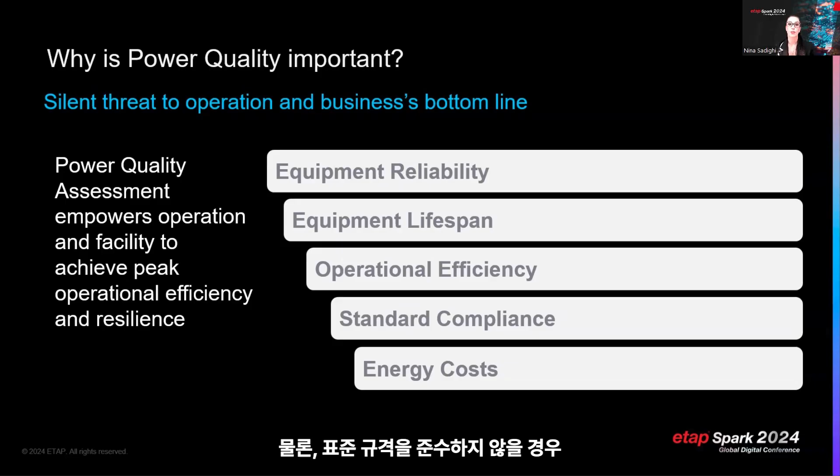So why is power quality important? Power quality is the silent threat to your operation, and it is costing you money. It impacts equipment reliability, it impacts equipment lifespan, it impacts operation efficiency and energy costs as well. And then, of course, if you're not complying with the standard, then there will be penalties for that as well.

So what causes harmonics in EV fleet? It's power electronic converters, rectifiers and inverters converting AC to DC or vice versa, switching operations, rapid switching of transistors, charging or fast charging methods and patterns of charging. And then, of course, whenever we have one charger, the system reacts completely differently than when we have a fleet charging, which is charging 300, 500 EVs simultaneously.

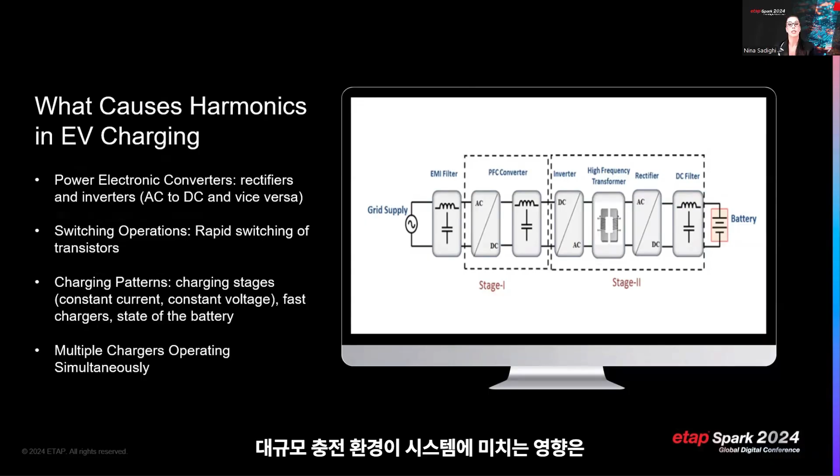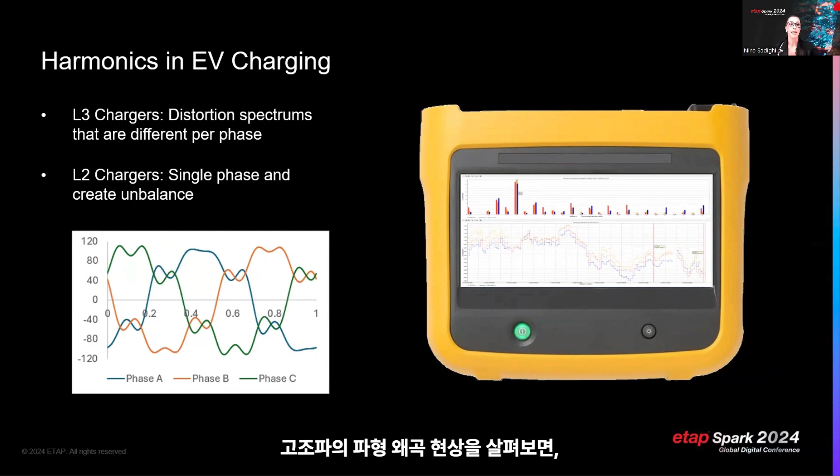And how that impacts the system is very different than what we're seeing in the lab, or what's shown on the cut sheets. So harmonics in L3 chargers, the distortion of the waves show very differently per phase on an L3 charger, which is a three-phase charger. And then on the L2 chargers that are single phase, we also noticed imbalances in the system.

So how did we go about planning this field evaluation? We collected data at multiple points for an agreed upon duration, so 4 to 6 weeks at each site, at the point of common coupling, at the switchgear, at the panel level. And we brought that into the ETAP model, which Jose will explain a little bit more. And then from there, we put together a root cause analysis, a comprehensive report that also focused on compliance review, and then developed an action plan, installed some mitigation solutions, and further evaluated our field results.

And what we noticed is that we increased energy savings by 10% and then increased uptime by 20% in the fleet. So then we took that feedback back to design, standardize and modularize the design on the EV fleet.

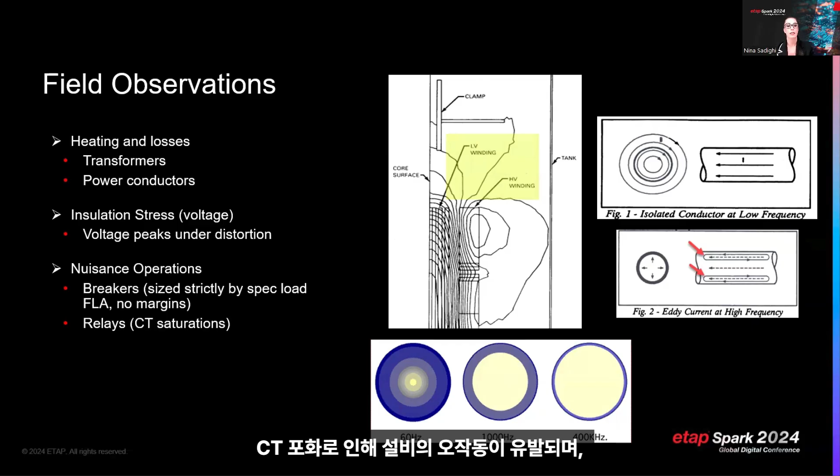So field observation: whenever we have harmonics, it's going to cause heat losses on transformers and conductors, which then leads into energy losses. Then there's going to be stress on the insulation of equipment, which then reduces the life cycle of the equipment and the lifespan of it. And then there's definitely always nuisance tripping with relays, saturation of CTs that then cause equipment to misoperate, breakers and fuses as well.

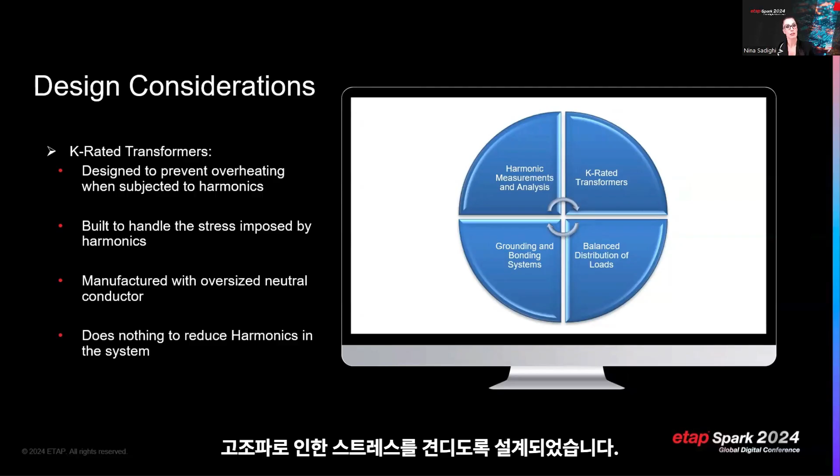So design considerations: of course, grounding and bonding is very important, and ensuring that we perform harmonic analysis early on in design so we can mitigate the design considerations we need and incorporate them. A K-rated transformer is a good design solution, which can really withstand harmonics, but it's not mitigating. It's manufactured with oversized neutral conductors. It does nothing for mitigating the system, but it's built to handle the stress imposed by harmonics.

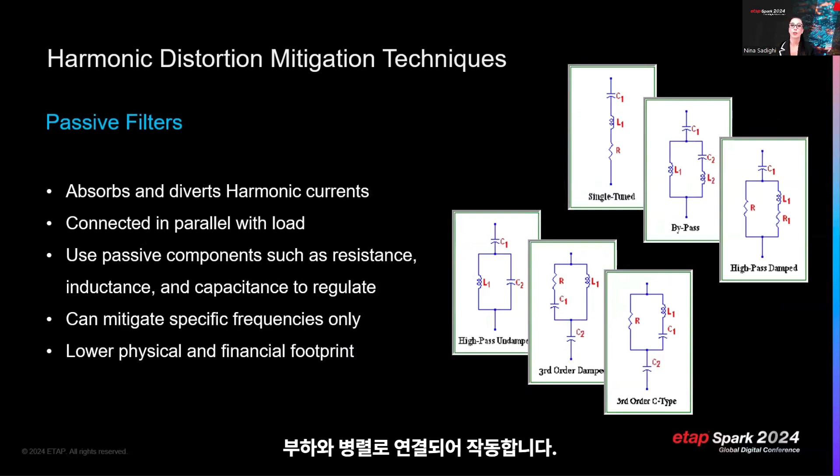Another mitigation technique is passive filters. They do absorb and divert harmonics, but at a very specific frequency that we specify for it. It's a lower cost and a lower footprint. It is connected in parallel with the load.

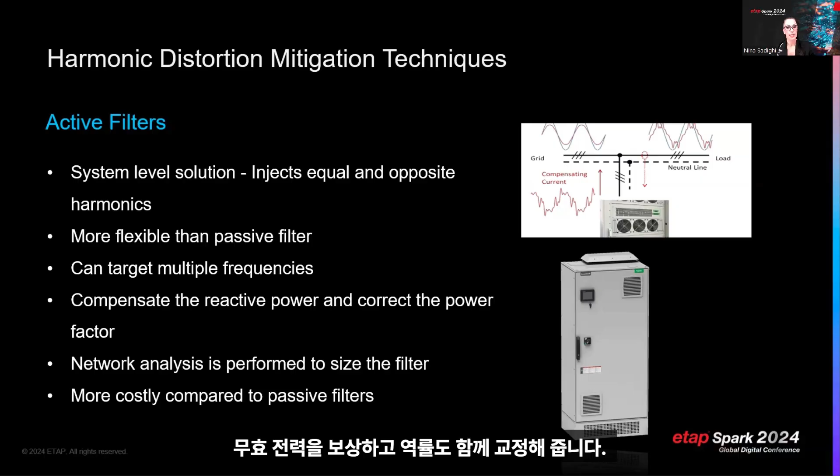Active filters are another solution. These are system-level solutions that inject equal and opposite harmonics. They're much more flexible and target multiple frequencies. They compensate reactive power and correct power factor as well. The downside of that is these are expensive and they do need a larger footprint.

Another harmonic mitigating technique is mitigating transformers. These are low maintenance, low cost, and they are superior to K-rated transformers, and they do absorb harmonics. They always stay energized and they are reliable. But to be able to accurately determine the required technique, we have to perform an unbalanced harmonic analysis. And I will pass on the presentation to Jose from ETAP Dynamics Department to explain how. Thank you.

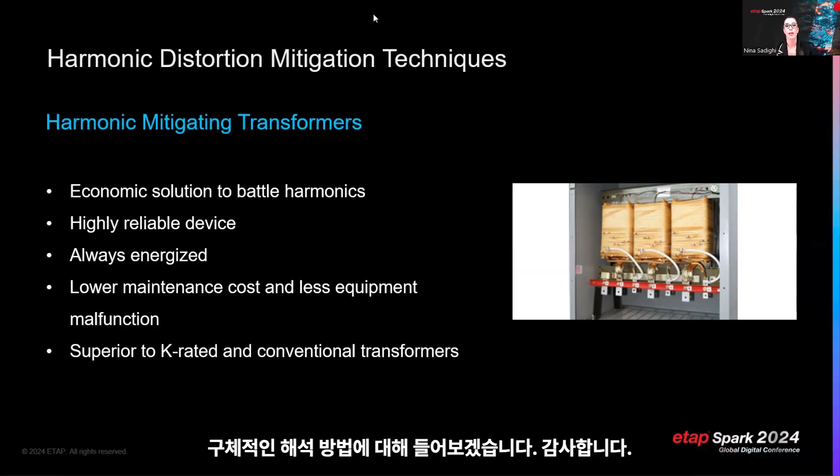I'll walk you through the process of harmonic evaluation in ETAP for the case Nina presented. Thank you, Nina, for sharing your expertise and providing an insightful overview of harmonic evaluation and the issues observed with EV chargers in the field. Now it's time to switch to ETAP to look at a few more details of the actual case, data requirements, project setup, analysis, and the results. Let's switch to ETAP.

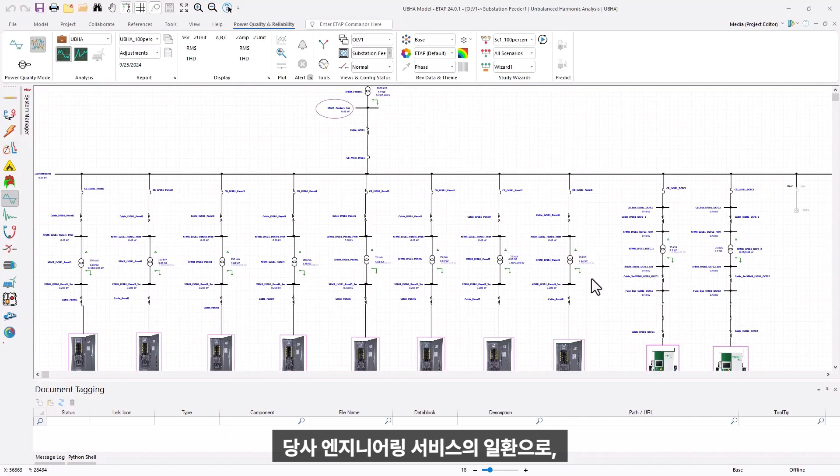As part of our engineering services, our team at ETAP Dynamics Division performed an unbalanced harmonic analysis study for a client. The project included multiple sites with electric vehicle charging stations that had level 3 DC fast chargers and level 2 chargers installed inside these panels.

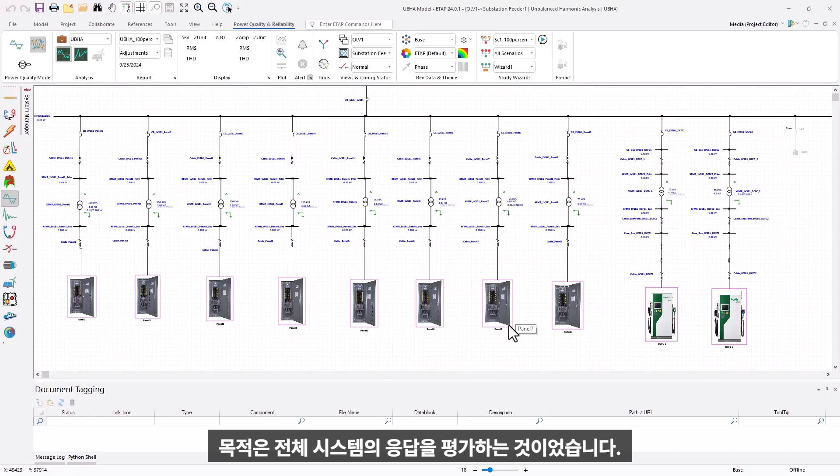The objective was to assess the overall system response due to harmonic distortion introduced by the EV chargers installed at the sites, and to determine system configurations and conditions that cause voltage or current harmonic distortion to exceed the limits established by industry standards such as IEEE 519/2022.

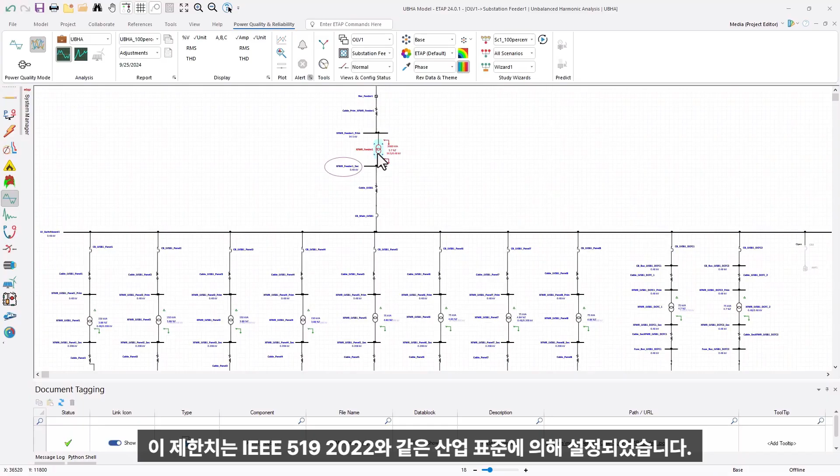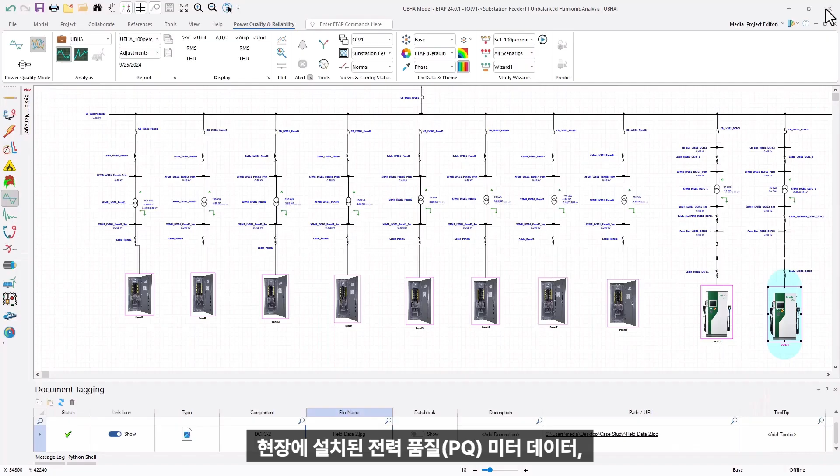Once all the available data was received from the client in the form of electrical permit drawings, equipment data sheets from the manufacturers, panel schedules showing different charger configurations of level 2 and level 3 chargers, field measured data of harmonic distortion from PQ meters installed in the field, and equipment photos and reports from other system studies, we started developing ETAP digital twin models of each of those sites.

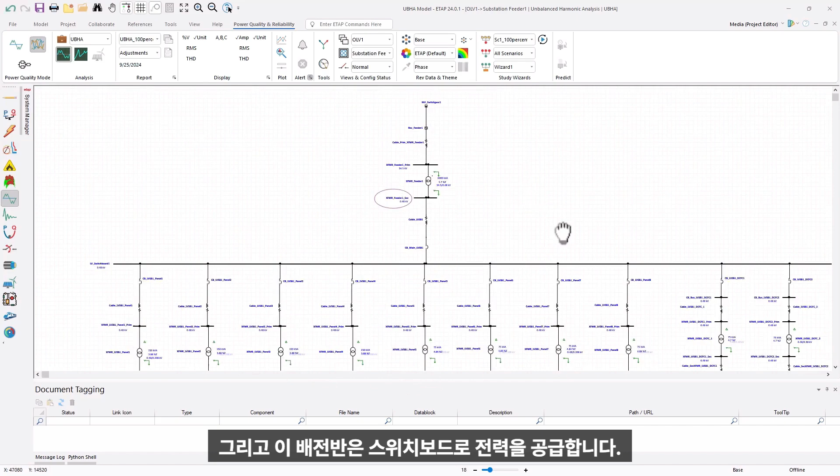The one we're seeing right now is a replica digital twin model of one of those EV charging sites that were analyzed. If you notice the topology of the system, it's represented by a utility feeding medium voltage switchgear, and the switchgear feeding switchboards through utility service transformers.

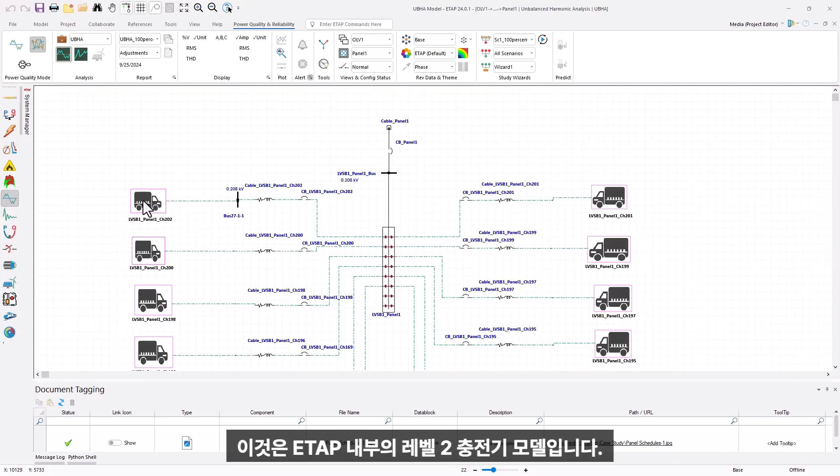Each of those switchboards have panels with level 2 and level 3 chargers connected. If we go inside the panel, we could see the charger configurations and the connections of chargers on different phases. This is a level 2 charger inside ETAP, modeled using the single phase charger element. If we go out of this composite and look at this DCFC, DC fast charger, which is a level 3 or L3 charger...

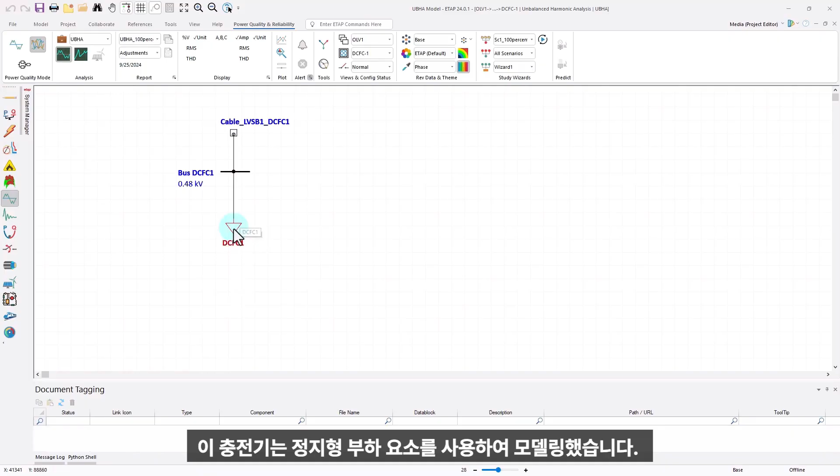We're modeling it using the static load element, so we could model the unbalanced harmonic spectrum, modeling it as an unbalanced harmonic source.

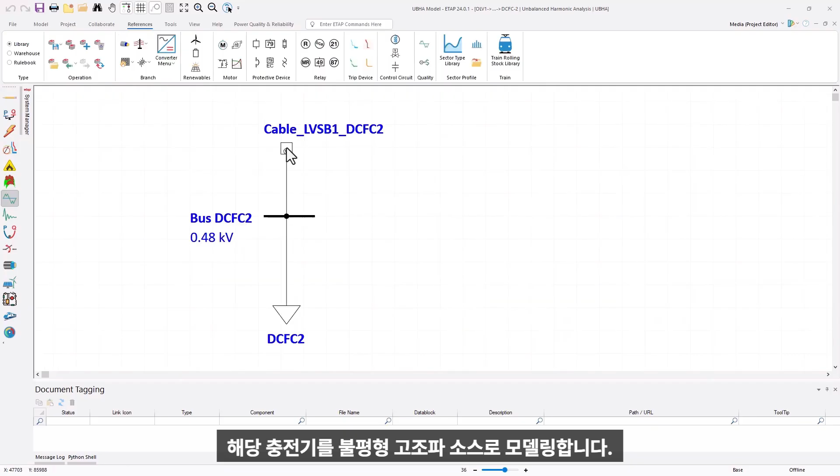While the one-line diagram was being created, we also worked with field-recorded harmonic distortion data to create harmonic libraries. These libraries were created considering the 95th percentile of the recorded data for use in modeling the harmonic sources.

In the case of L3 chargers, the current drawn by the equipment during the charging cycle has a dynamic behavior. The harmonic current injection from this equipment to the grid also differs depending on the moment in time during the charging period. To account for this behavior, two sets of harmonic data were extracted at two different instances in the charging cycle.

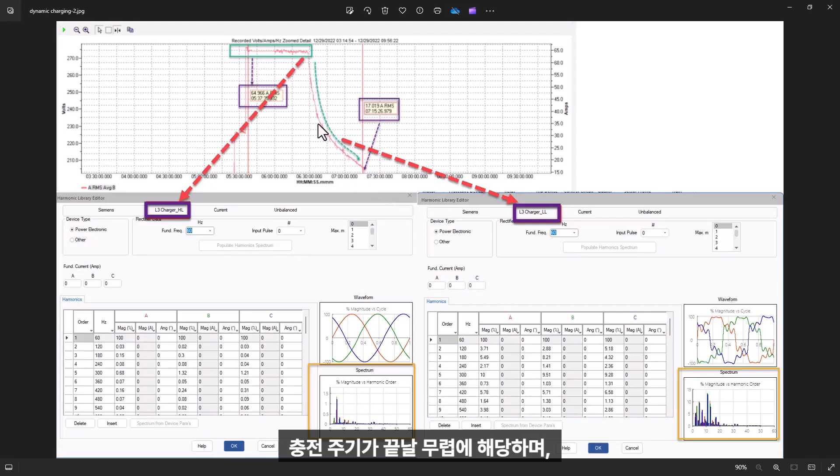One at the beginning of the cycle, where the charger is constantly drawing its rated current, considered the highly loaded condition. Another when the charger current consumption has decreased towards the end of the charging cycle, considered the lightly loaded condition.

We can see these libraries by going to the References tab, then Library, then Unbalanced Harmonics. We would see two sets of data created for the L3 charger: highly loaded and lightly loaded conditions.

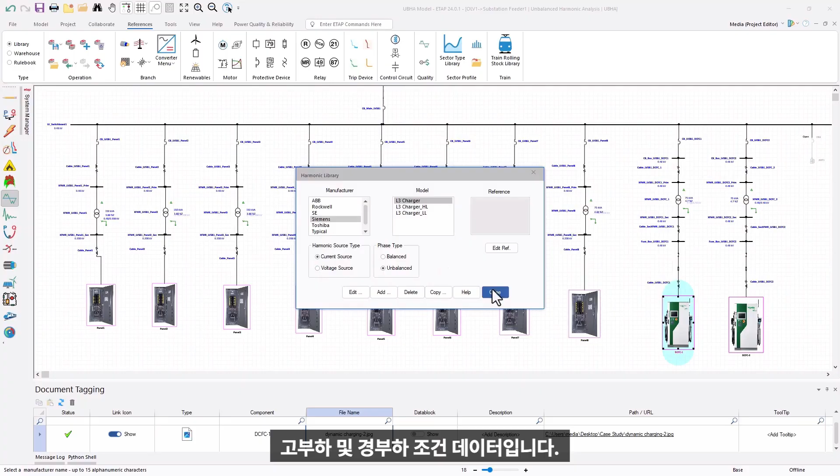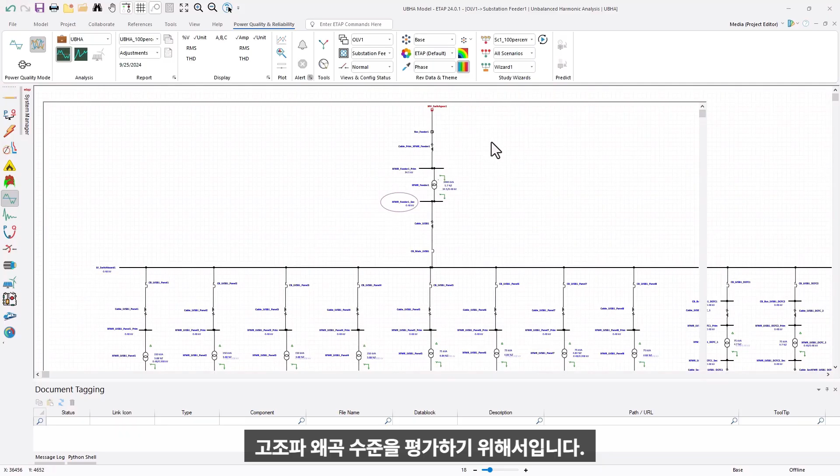Several scenarios were created to perform simulations to determine system responses under various possible operating conditions, including the effects of unbalanced loading and system configurations. Six PCC locations, point of common coupling locations, were analyzed to evaluate the harmonic distortion levels coming from the EV charging facilities towards the utility network.

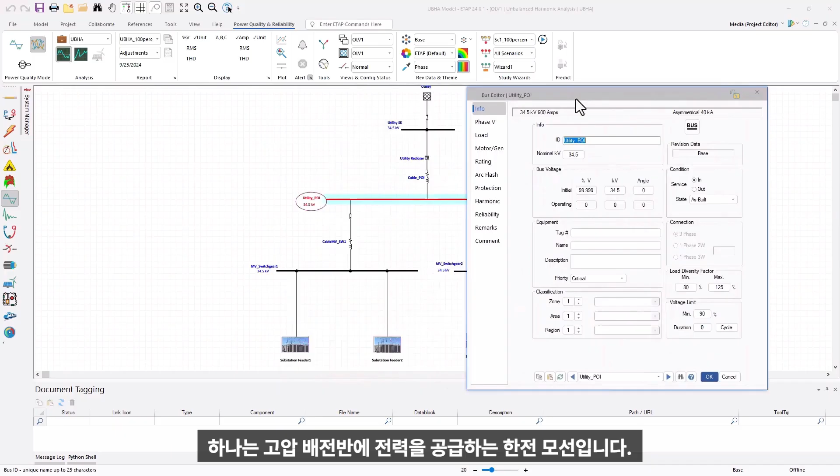These locations have been highlighted with ellipses around them. Let's take a look at one of those buses. One is the utility bus feeding the medium voltage switchgear. If we go to the harmonic page, we'd see it set up as a PCC/POI with the rulebook configured to compare the harmonic distortion results with the limits from that rulebook.

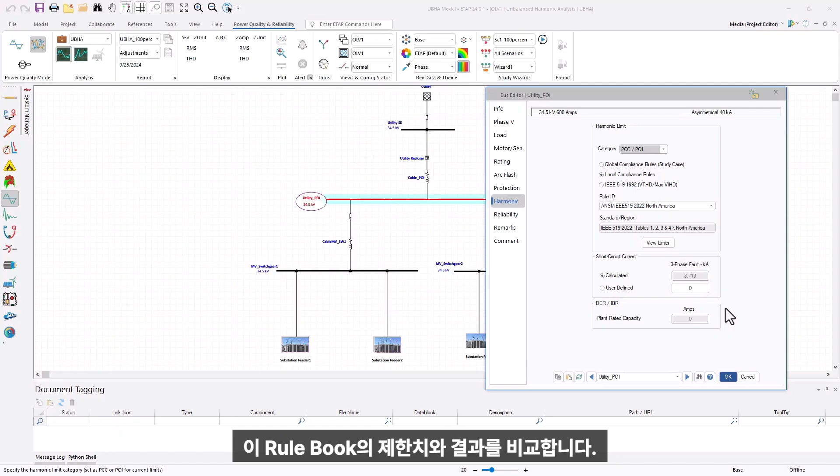We have 5 substation composites here. Going into each one of them, we'll have the service entrance transformer. The secondary of each of those transformers are the locations where the results were analyzed.

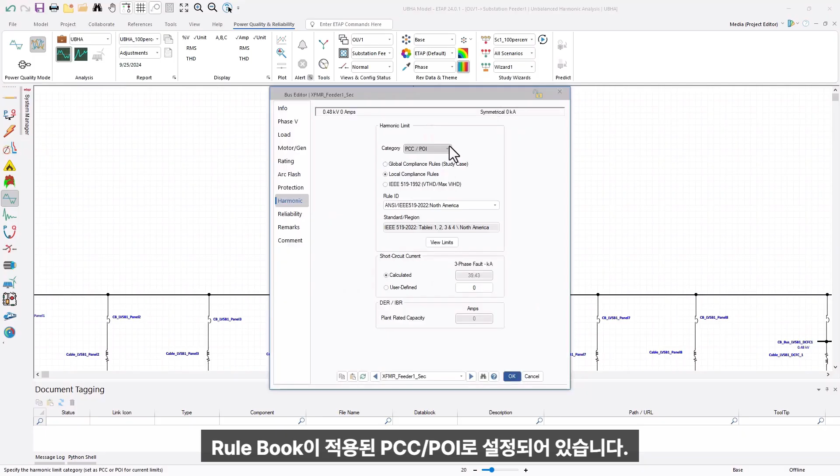Let's take a quick look at the harmonics page of one of these buses, set up to PCC/POI with the rulebook set up to compare the distortion results of bus voltage distortion against the voltage limits from this rulebook.

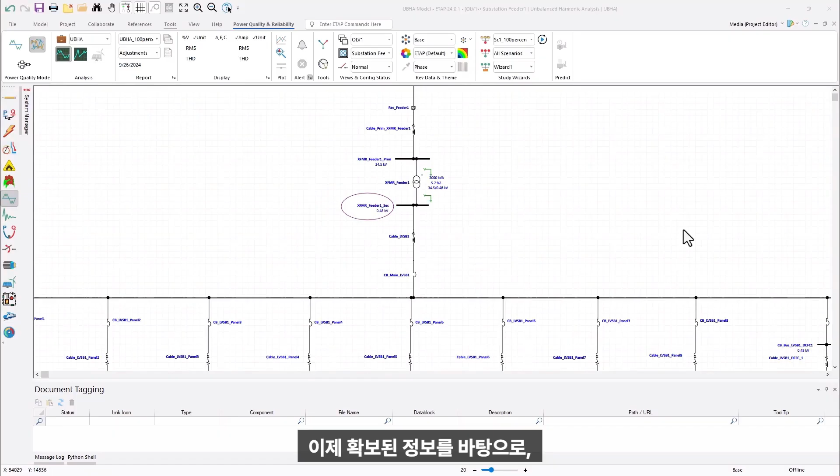So now with this available information, let's try to run the scenarios. We have one of those scenarios where harmonic voltage or current distortions are exceeding the limits provided in the standard. The one we're going for right now is scenario 5 BC 100% load, where we could see exceeding distortions in substation feeder 4.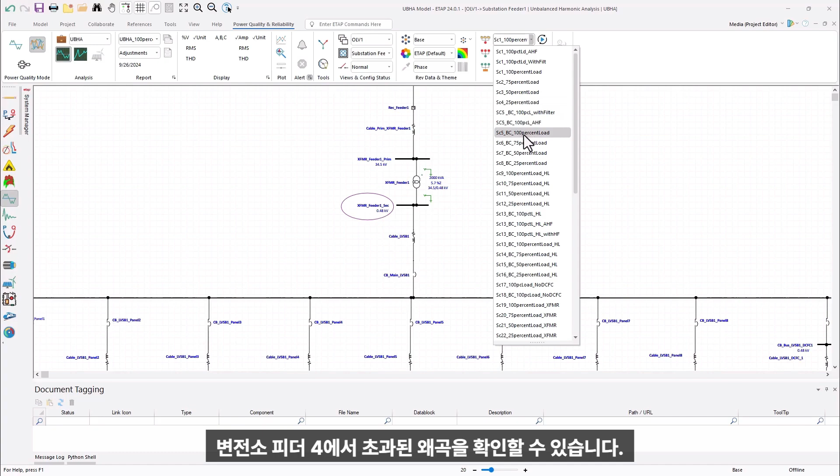So before running the study, let's move out of this composite and move into substation feeder 4. We're evaluating the results at this transformer secondary bus and service entrance cable here.

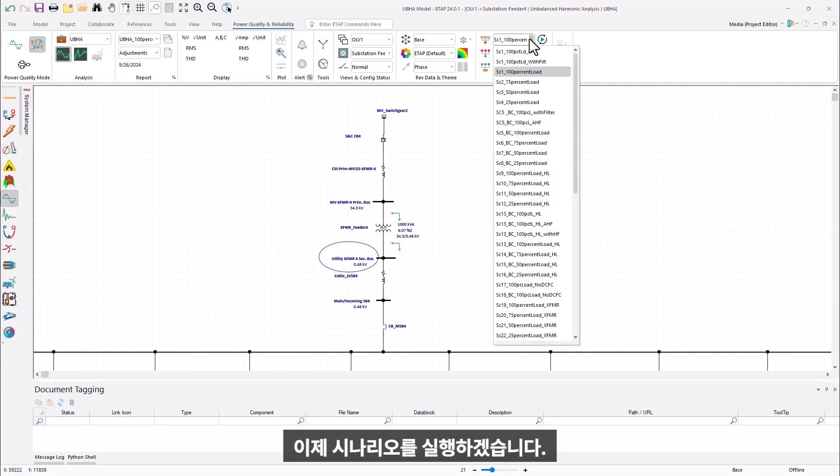So let me go and run the scenario. Let's look at the voltage distortion results at this bus and the current distortion results at this branch service entrance cable.

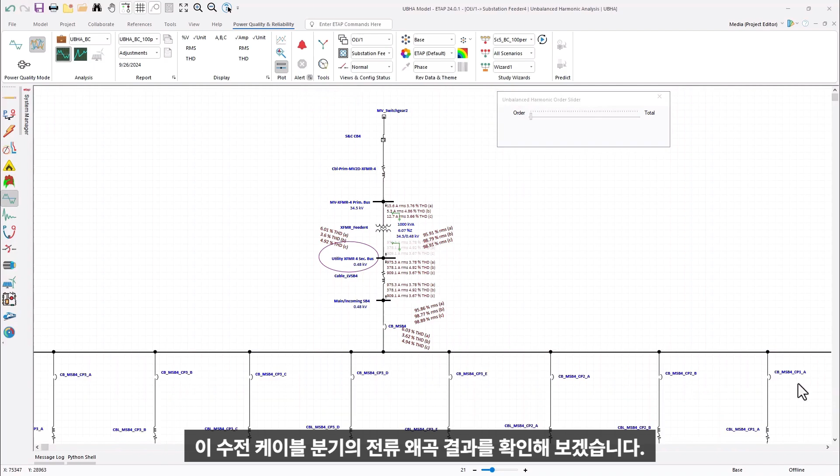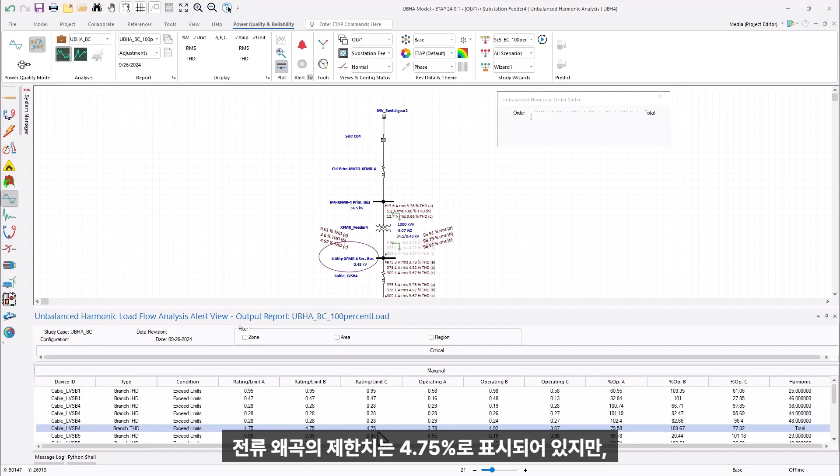Let's go to alert view. If you notice, we have several alerts for cable LVSB4 for different harmonic orders, including the one for total harmonic distortion, showing limits of 4.75% for current distortion, whereas phase B has 4.92%. It's exceeding the limits provided in the standard and study case settings.

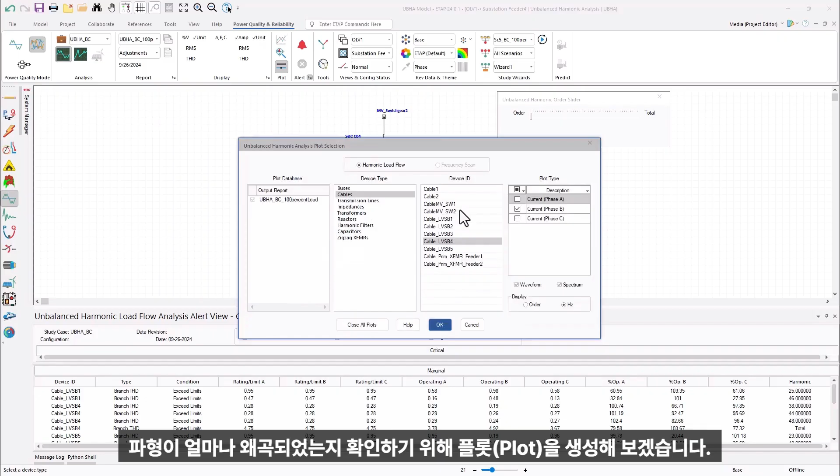So let's plot this to see how distorted the waveform is. Cable LVSB4 phase B - so it's a distorted waveform.

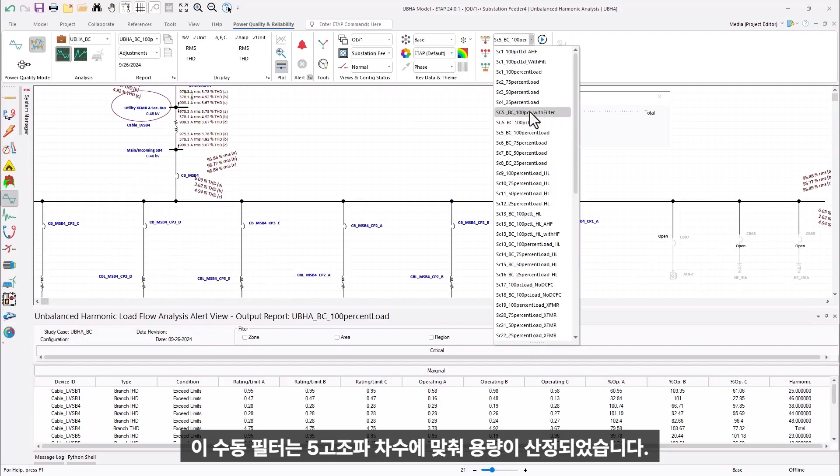Now let's also run the case where we have a passive filter sized for the 5th harmonic order. This is one of the solutions provided to the client for addressing the harmonic distortion issues noticed in the field due to the harmonic content from the EV chargers.

So now we have the results for this scenario. Voltage distortions at this bus have reduced, and the current distortion on phase B for this cable also has come down from 4.92 to 3.56%. Let's take a look at the plot.

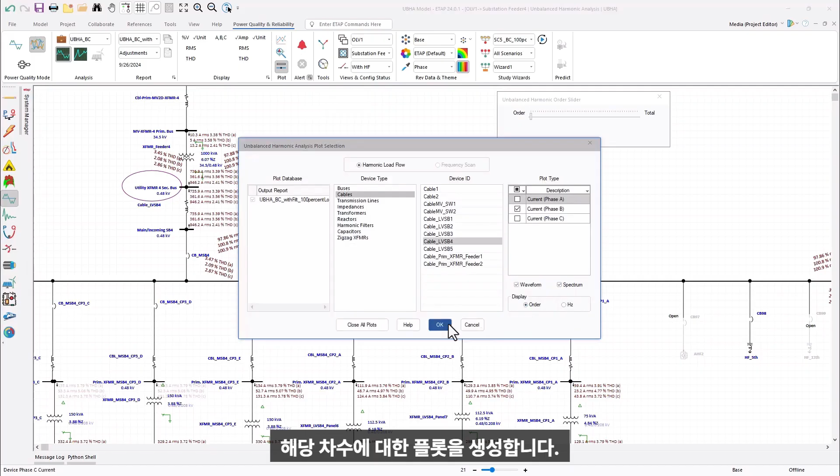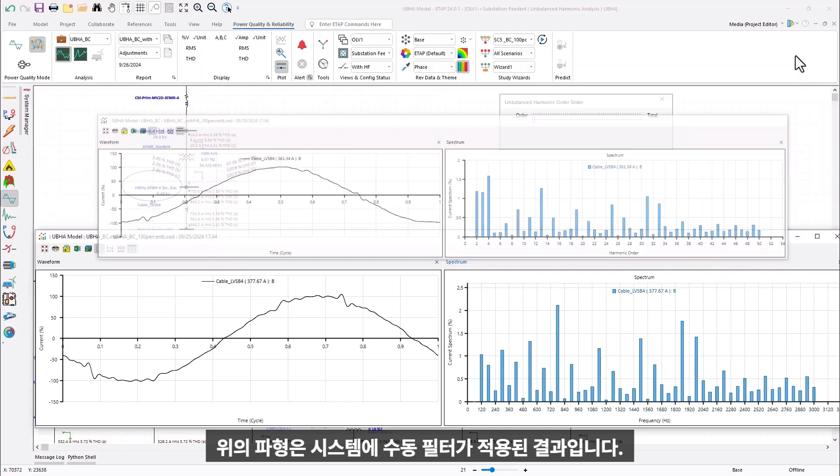Let's do it for the order. If you notice, the waveform distortion has reduced significantly. This was the one without the passive filter setup, and the one above is the one with the passive filter in the system. So let's minimize these and now run another scenario

with active harmonic filter. So if you notice, there's results here from this case with active harmonic filter installed. The voltage distortions at this bus got mitigated significantly, and the current distortions have been reduced significantly as well.

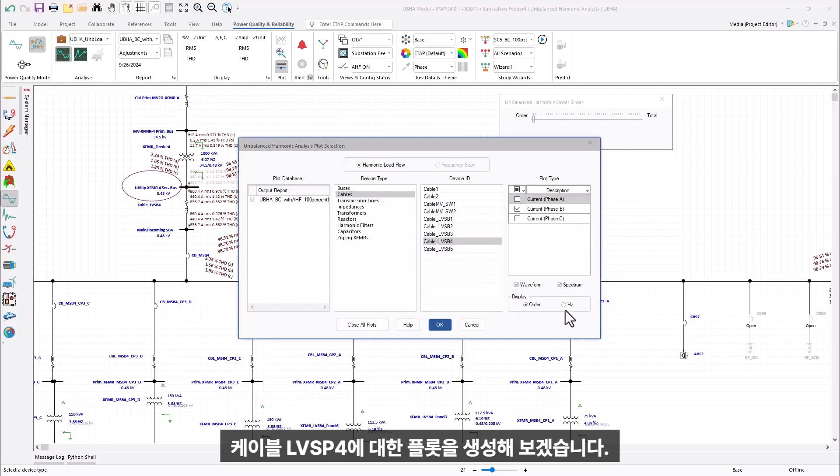So let us generate this plot for this cable LVSB4, and let's compare it with the case where we had distortion before - that is the case with 100% load and no filter installed. So the waveform got cleaned significantly with the active harmonic filter in place.

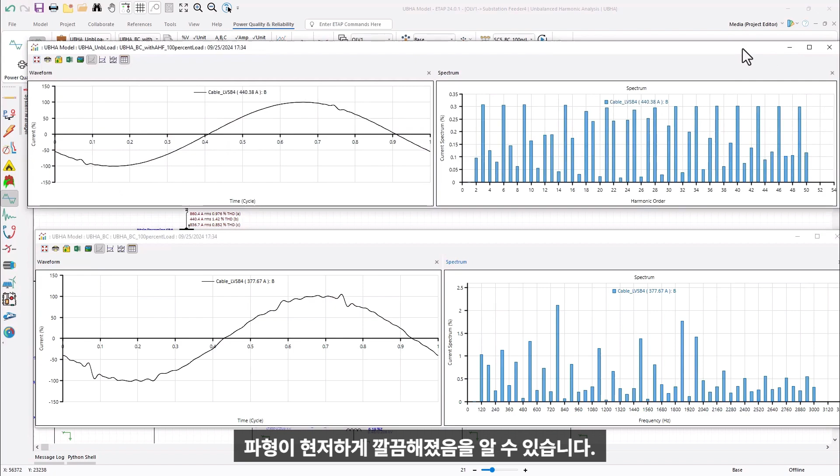So as part of this harmonic evaluation, we noticed violations of percentage total current harmonic distortions at this PCC location. To address the issue, we have run scenarios that were set up with active harmonic filter or with passive harmonic filter installations in the location. In both cases, we've noticed significantly reduced distortion in the waveform.

Similar to this PCC location, there are other locations in the systems and in all different sites. For all the scenarios that were set up, among them, several had PCC locations where either voltage or total current harmonic distortion violations were noticed. For all those cases, similar solutions were recommended to the client for mitigating the effect of harmonics and keeping the distortions well within the limits provided by the standard.

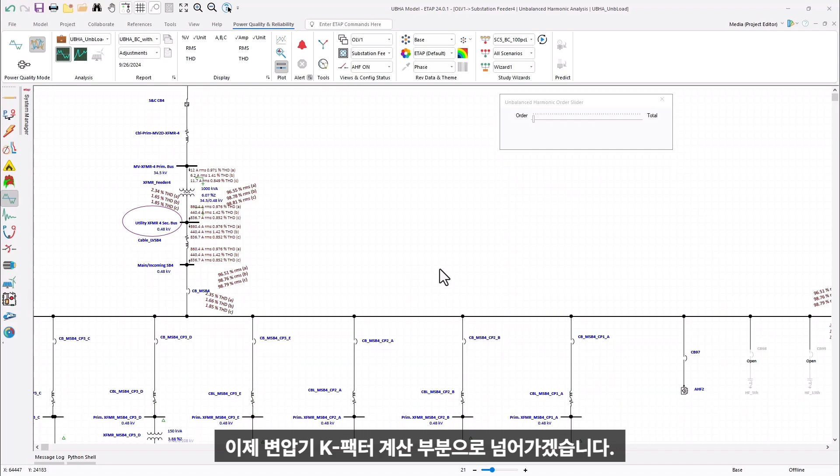With that said, let me take you to the transformer K-factor calculation that was also performed as part of this analysis in the project, and recommendations were provided to the client in terms of K ratings of the transformer.

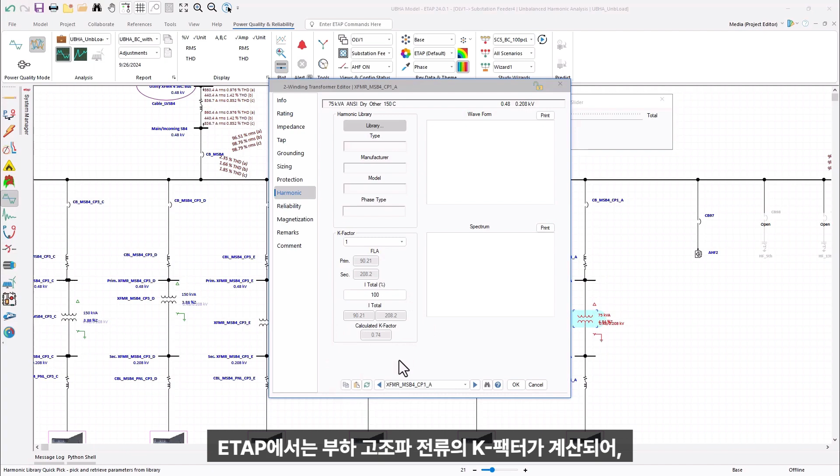Measurement of harmonic currents in the network and determining the heating effect of these non-sinusoidal currents on transformers is an important step in determining appropriate transformer size and K rating. So the K factor of the load harmonic currents is calculated in ETAP to determine the required K rating of the transformers feeding the nonlinear loads.

In this case, for this transformer, the calculated K factor is well within the rating of the transformer, but there are several other locations for transformers connected to panels where chargers are connected, such as this one, where the calculated K factor due to the harmonic content is higher than the K rating of the transformer.

Such cases might lead to excessive heat losses within the transformer, which would reduce the equipment's operating life eventually. So for such scenarios, we have these evaluations done and recommendations offered to the client. And in such cases, if clients were to choose higher K-rated transformers, there is a feature to choose the K rating of the transformer here and perform evaluation with a different scenario.

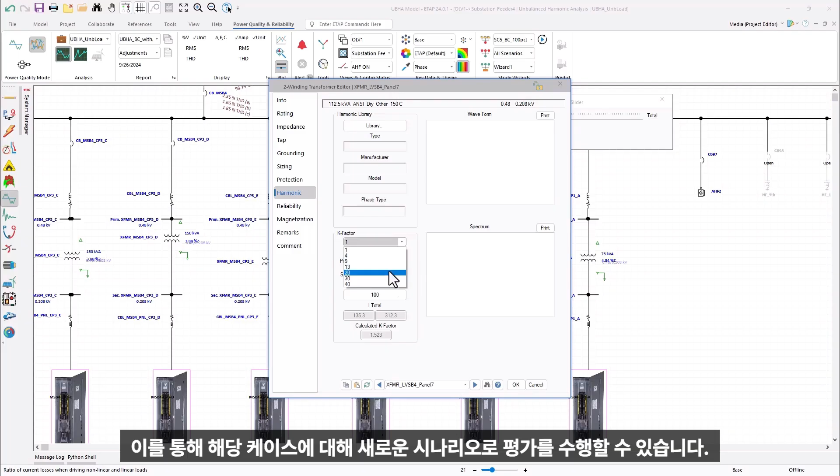As part of this analysis, in addition to calculating the K factor due to the harmonic composition and the load current, ETAP also identifies the derating requirements of the transformers and flags them in the alert view.

When a transformer is subjected to a load current having significant harmonic content, additional eddy current losses in the winding and also in the metal parts of the transformer elevate the temperature of those parts above their normal operating temperature, leading to a loss of life expectancy of the transformer. To avoid such scenarios, ETAP calculates the derating factor for load currents and flags derating alerts for both primary and secondary windings of the transformer.

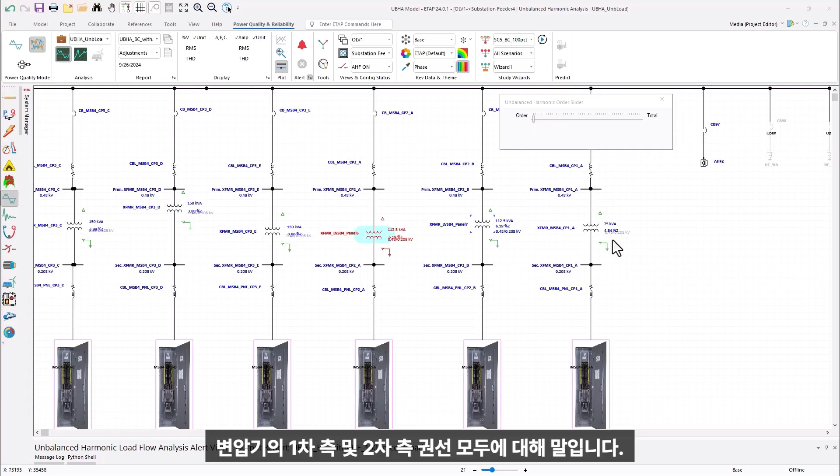So let's take a look at the alert view in this case. Transformer LVSB4 panel 7 and transformer LVSB4 panel 6 are both flagged for a derating condition.

If we open one of the transformer editors and go to the harmonic page, we see the rated ampacities of the windings of this transformer given here. But the capacity ratings that we see under ratings in the alert view are lower than this. These are calculated using the derating factor, and currents passing through the transformer are compared against the derated values, with derating requirements flagged in the alert view for devices with the condition overload with losses.

So some transformers were found to have continuous overload due to the effect of harmonic distortion. Alerts, as we're seeing, are generated based on the derating factor calculated from the harmonic content in the current injections.

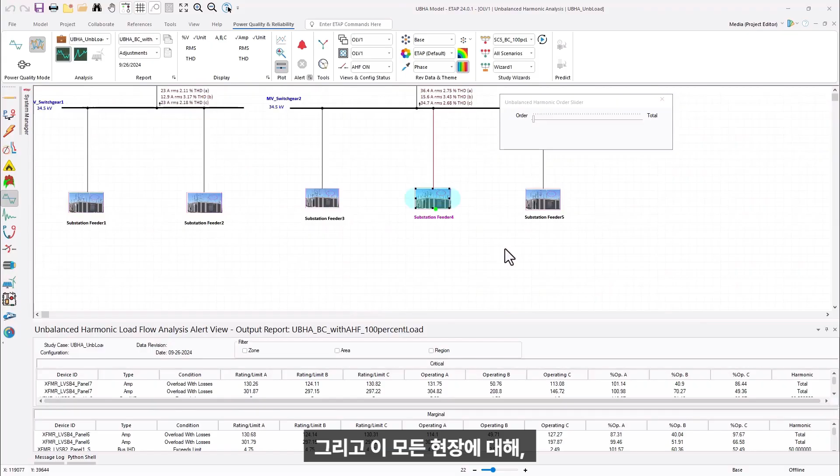So to sum it all up about this case, all the EV charging sites that were considered for analysis were modeled in ETAP using ETAP digital twins. For all those sites, several scenarios were created considering all possible conditions and configurations to perform the analysis. Libraries were created by extracting data from the dynamic charging cycles of the DC fast chargers.

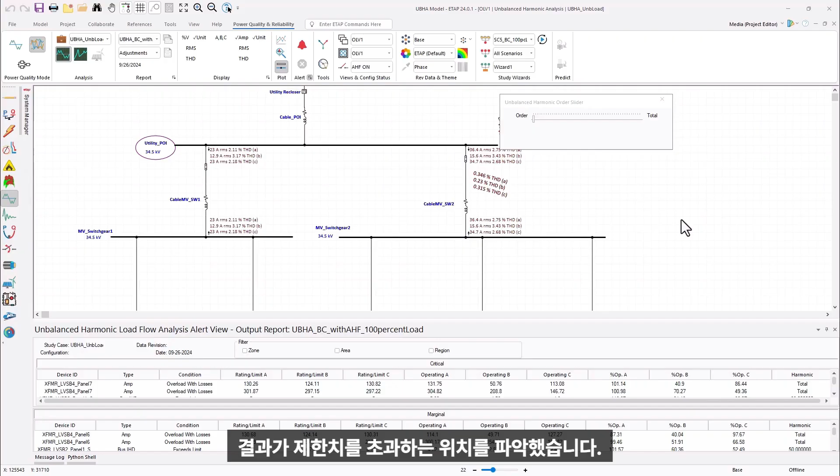The evaluation was performed to identify percentage total current and voltage harmonic distortions at the point of common coupling and other locations, and those locations where results exceeded the limits were identified. Possible solutions such as installation of active harmonic filters at the switchboard level were recommended to deal with the excessive voltage distortion noticed in some locations.

Additional characteristics of this technology, such as power factor correction, phase load balancing, and dynamic harmonic mitigation adjustment to match the operating requirements of the client systems, were also recommended.

Based on the common findings for all the sites, it was recommended that for future sites, K-rated transformers are installed for the panel. As observed generally for all the sites in the study, further loading could create unbalanced conditions and introduce additional harmonic distortion to the system. Having these K-rated transformers and filtering devices in place could take care of harmonic distortions due to unbalance created with additional loading in the system in the future.